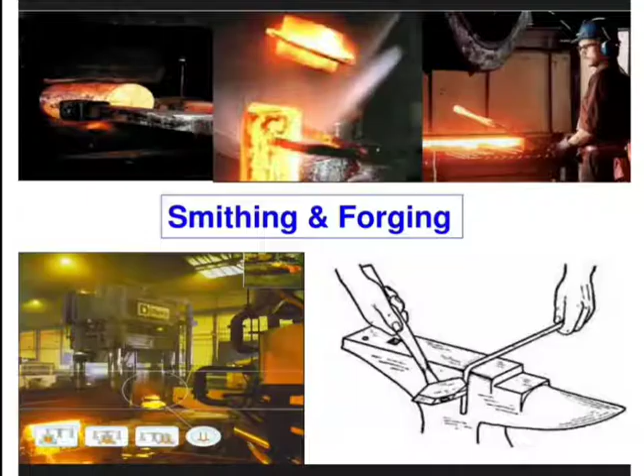Smithy and forging. Smithing. Now, what is smithing? It is a process of performing various operations on a relatively small workpiece. That workpiece is heated in an open fire hearth furnace and force is applied to manipulate the metal, to give the shape to the metal by means of hand hammers or small power hammers in the smithy shop. Thus, it is a process.

Smithing is a process where the job is heated in the open fire furnace to a certain temperature to obtain plasticity, up to 1000 to 1050 degrees centigrade, and that hot piece is taken on the various equipment and given a force to achieve the desired shape.

Now, what is forging? It is a process of producing those parts which must be heated in a closed furnace, and force is applied to manipulate. Manipulate means give the desired shape to the metal by means of heavy hammers or forging machines or presses.

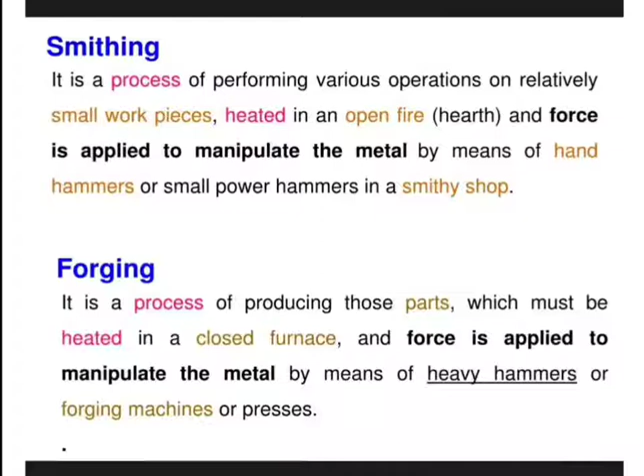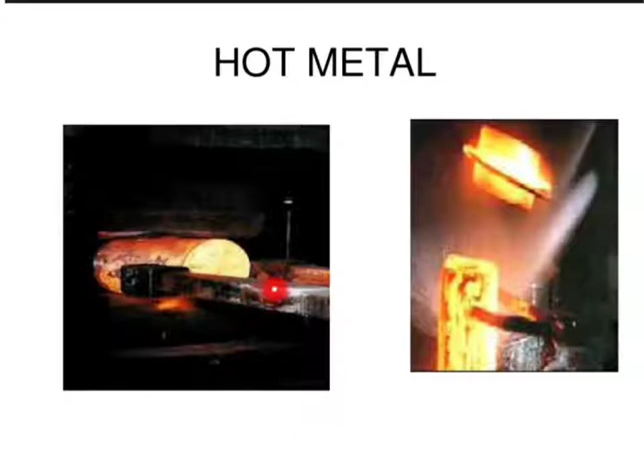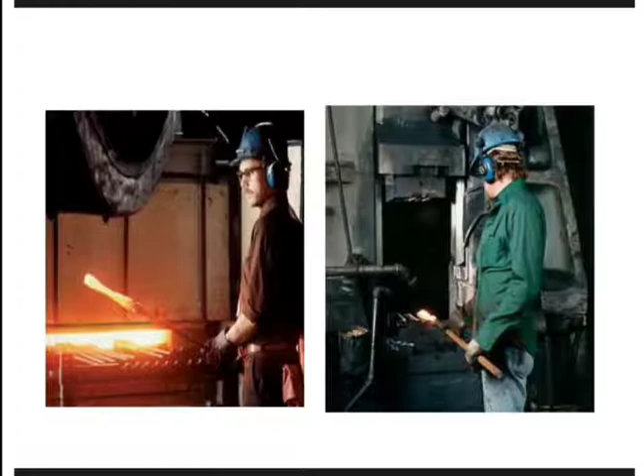Here is shown a rod heated to a certain temperature, so that the color is changed in the furnace. Here is a tong which we hold. This is the furnace. We have taken out the job after heating. Now they have given the leaf hook.

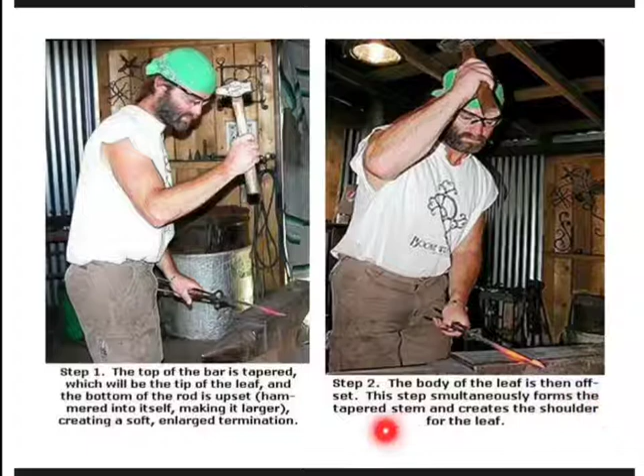Here we observe the operation. The top of the bar is tapered, which is to be the tip of the leaf, and the bottom of the rod is upset, hammered into itself, making it larger, creating a soft, enlarged termination. The body of the leaf is then offset. This step is simultaneous with the taper stem and creates a shoulder for the leaf.

Here we observe the next step. In the next heat, the leaf is spread on the anvil. This is blown over at one end here. The thickness is increased and its width is increased here, and then the leaf is given the three-dimensional profile.

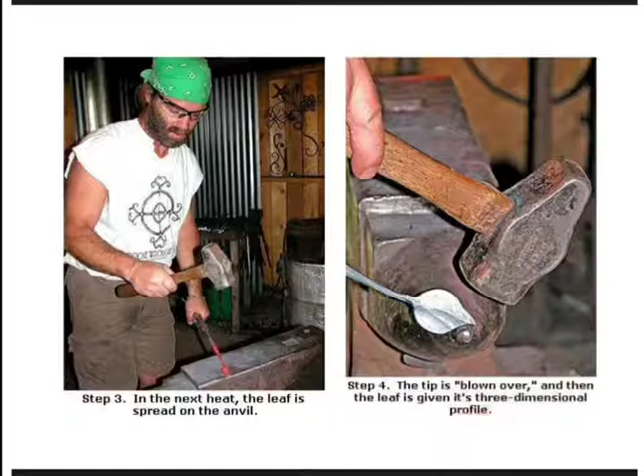Here the countersinks are forged into the bar, which creates a solid purchase for the screws and adds a visually strong forged design element to the hook. The touch mark name stamp is forged on the back during the heat. During the following heat, the leaf end is bent into its graceful character.

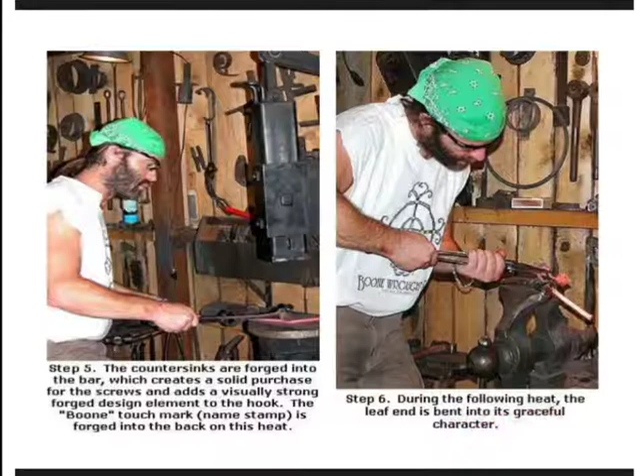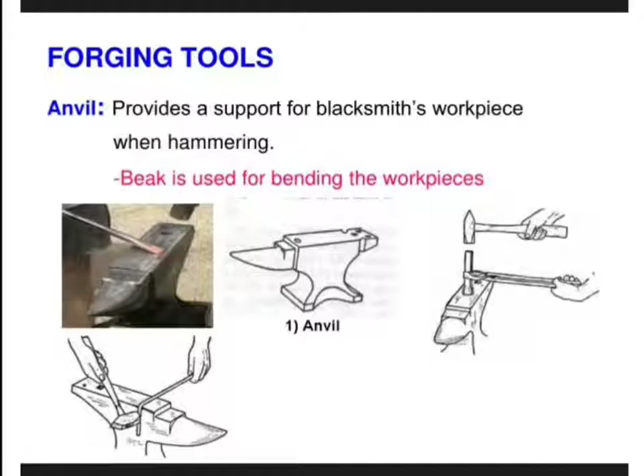First, the anvil provides the support for the blacksmith's workpiece when hammering. This is a beak. The beak is used for bending the workpiece. They have shown the operations. Fullers. Here is shown the fuller. The fuller is used for necking down a piece of work.

We use the swage to obtain a reduced and finished round, square or hexagonal form, made with half grooves of dimension to suit the workpiece. This is the half dimension. Whatever shape is required, square, hexagonal or round form, that half shape is developed here, and we obtain the shape on the job which is heated.

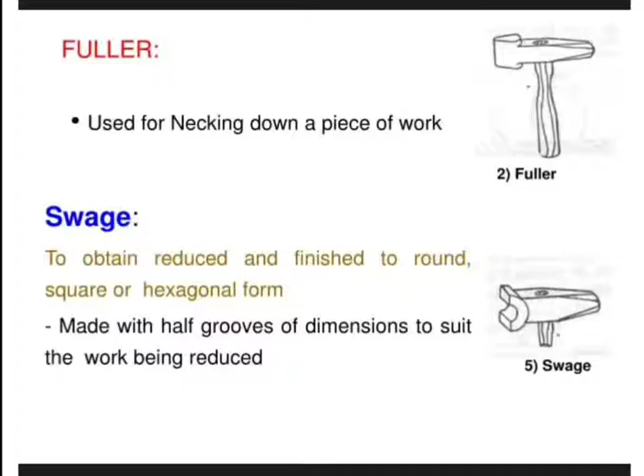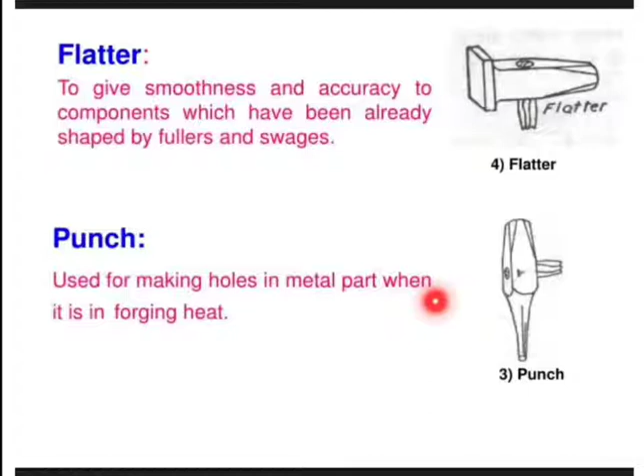Now what is the flatter? It gives smoothness and accuracy to the component which has already been shaped by the fuller and swages. This is the flatter. Punch: this is used for making holes in the metal part when it is in the forging heat condition.

Now tongs for holding the workpiece. The types of tongs: the flat tong for holding work of rectangular section, ring tong for holding work of circular cross section, gad tong for general pickup, either straight or tapered. Here they have shown the figures of the tongs.

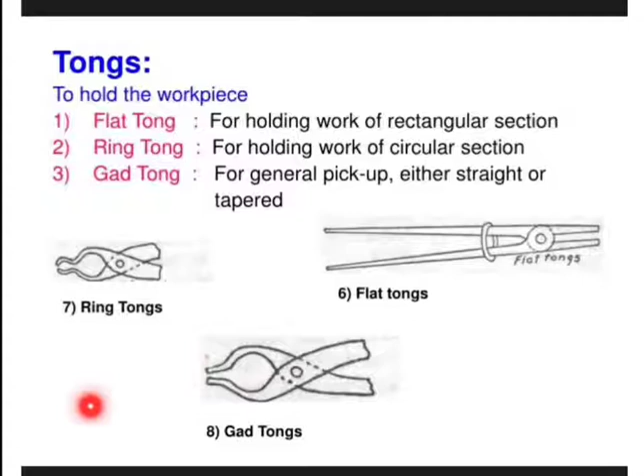Now this swage block is for squaring, sizing and bending operations. Here are the holes created. Here are a number of half circular cylindrical sections shown here. Here are full circular sections.

Holes are created. Here are some straight sections. The chisels are for cutting the metals and for necking prior to breaking. They may be hot or cold depending upon the metal to be cut in hot or cold condition. Here is the picture of the chisel.

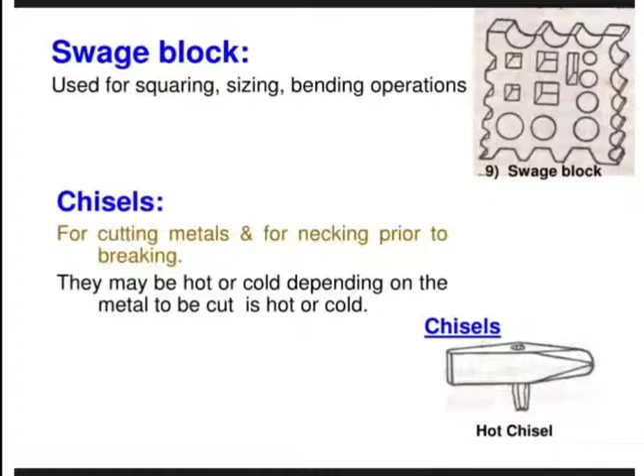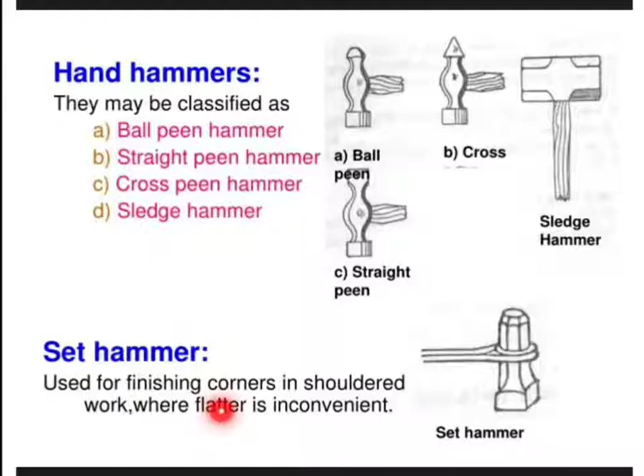Hand hammers. These may be classified as ball peen hammer, straight peen hammer, cross peen hammer and sledgehammer. According to the cross section at one side, they are given the name. This is a straight peen, this is a ball peen, here is a ball, this is a cross peen hammer. Now what is the set hammer? It is used for finishing the corners in shouldered work where the flatter is inconvenient. This is the set hammer. Okay, thank you.